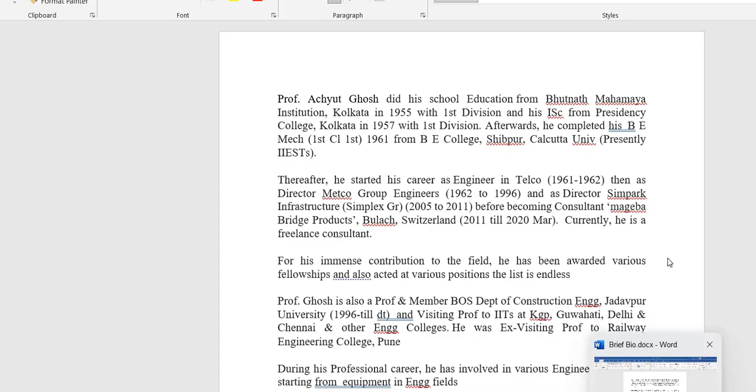I'll try to enter my screen. Enter, this is one, okay. Your entire screen? Yes. Here, which one? No, this one. This one. Mute. No, huh? Cancel. Mute. Sir, may I help you in sharing your screen? Mr. Ghosh, you are muted, please unmute. Mute and share your entire screen. Is that it? Yes, yeah. Yes, and then which one?

I'll click this one, the present now next to the hand symbol. Yeah, you have a top arrow, sir, can you click on that? This one? On the right of the hand symbol. Hand symbol is there, the one next to that, to the right of it. Present now. Huh? Share. Yeah, sir, it's coming up. Wonderful, we can see it now. You can see it now? Yes, okay.

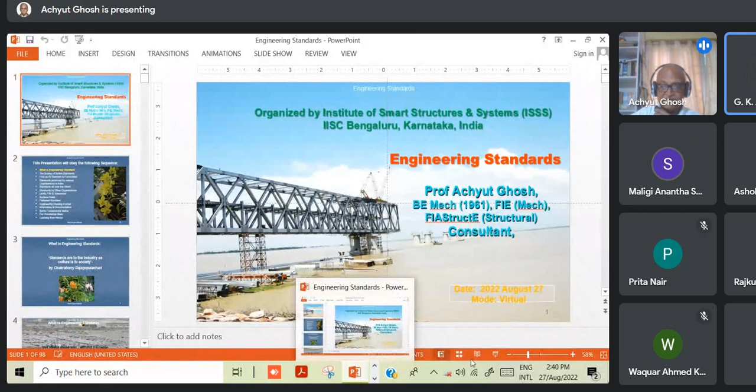So, how do I change the screen? You can click on the PDF file which you have, or the PowerPoint, whichever - this one I have to remove, I have to shift to that. Wherever the PowerPoint is. While it is opening, you can hide that small pop-up thing - yes, sir, the pop-up. Hide. Above - no, don't click that, not that, sir - hide, on the right, hide. There, yes. Okay, wonderful, now you can go to full screen. Full screen, yes. Can you see it now?

Yes, sir, wonderful, it's clear. Can you see me also, or only the screen? Yes, we can see you also. Oh, that's fine, I have done it. Thank you. So I called my granddaughter - I mean, these things are very touchy - so I called my granddaughter and she helped me with this.

Okay, now it is 2:40. I hope you will give me 45 minutes. Yes. So it is 2:40. What I'll do is share my presentation in two parts. One is 30 minutes, which will be on the job itself - engineering standards. And for 15 minutes, there are certain items which I feel an engineer should know, which are not directly connected with engineering standards.

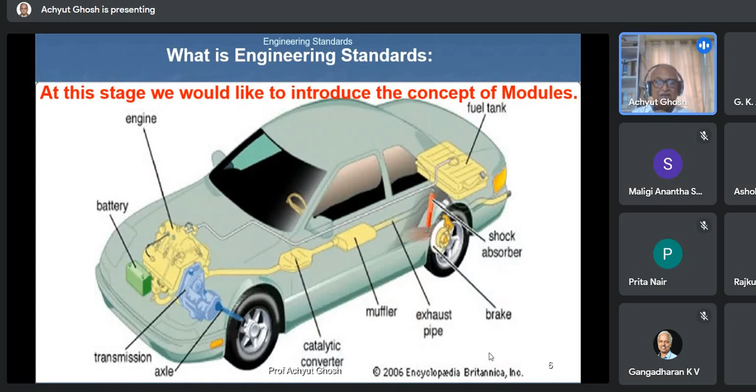This is an engine manufacturer. He knows the engine. To the next man, that is the transmission, you can see the right-hand picture, he knows about the face to which the clutch will mate and the hole on which the clutch transmission assembly will be aligned. So he knows these two things only, and the space given to him by the car manufacturer. Nothing else he knows. He knows maybe the number of gear shifts and all this. So this is how the engineering industry works.

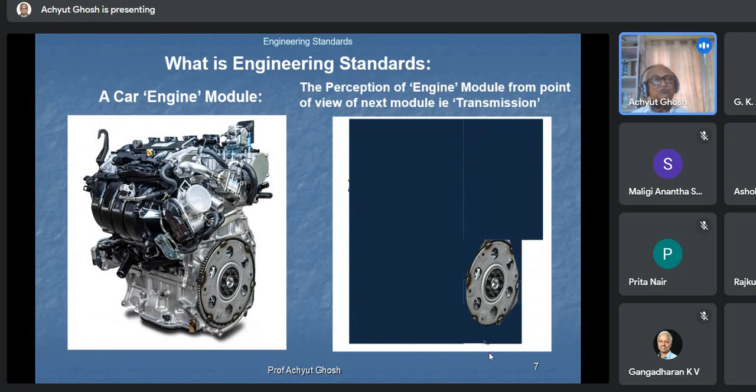Unless there is some standard guiding the people what to expect, nothing will work. You cannot go on giving all manufacturers lots of statements saying this will look like this, this will be like this. That will take 5,000 pages at every stage of transfer. That is not a done thing. What is a done thing is we accept one standard, that is limits, fits, and tolerances,

and the various codes developed by the Indian Standards Institution, that is the Bureau of Indian Standards, and then ISO, International Standards Organization, which we will come to in due course. So there could be standards on anything: on a soap, on a light, on air conditioning, on a bottle, on anything, on threads. But for our discussion, we'll spend a few minutes on limits, fits, and tolerances.

This is how a car part works inside. The piston may be made in Italy, the camshaft may be made in Yugoslavia, the gears may be made in India, like that. But everybody follows a standard and a specification, and the whole assembly works.

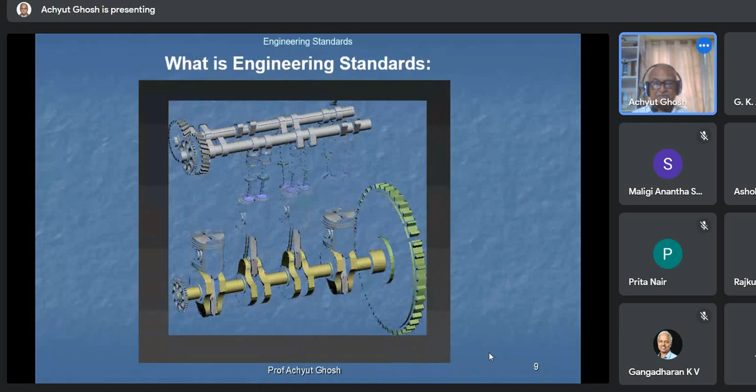So these are various data in '46 the Department of Industry thought about. In January 1947, the Indian Standards Institution was started. Mid-1980, ISI became BIS, but we go on, and only the Bureau of Indian Standards Act in 2016 has been created. Very late, but it doesn't matter. This Bureau of Indian Standards is a purely Government of India organization.

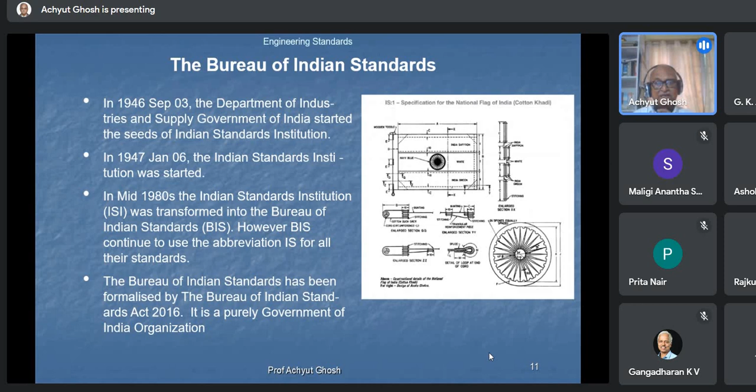How an IS standard is formulated, this will take a few slides.

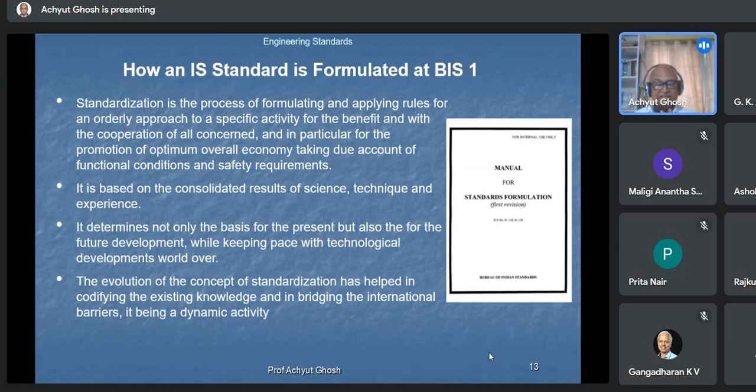There is a manual for standards formulation. These manuals talk about the process of standardization, how it is created. I will not read all this, it will take a lot of time.

There are various groups, SMBC, SMDC, etc. And as on date, there are about 20,000 Indian standards published. As I said, it could be on various things, a light bulb, a pen, like this.

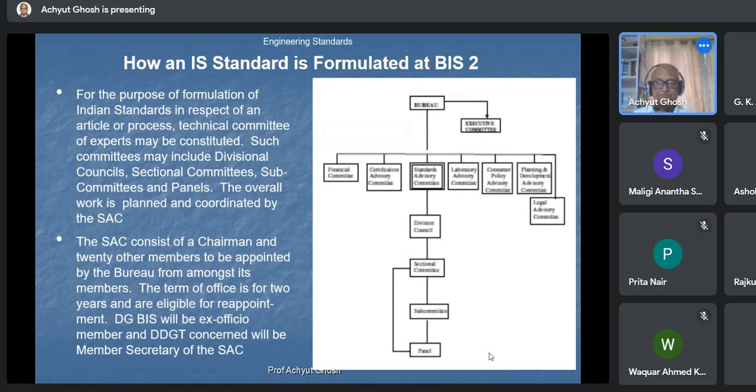Next, we'll show you 3 facsimiles of IS standards. One is 1231. It covers the frame of squirrel cage motor, or let us say electric motor.

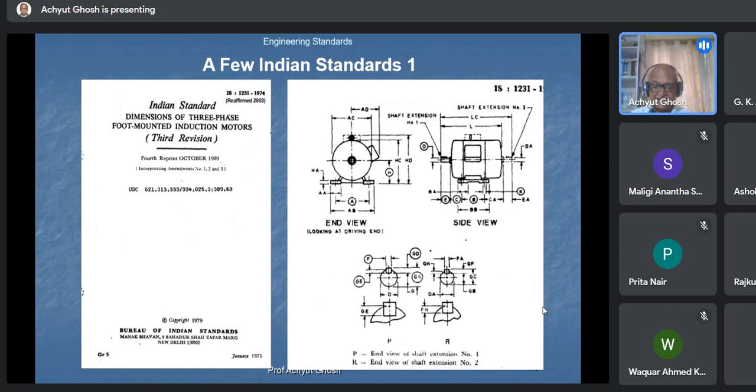It covers the frame, and the basic thing is this height, H, height from the base. So the frame is like this. You can see the frame numbers on the left, 90S, 112S. 112 means the height of the center line from the base is 112 millimeter, but it could be S, M, L, meaning the length could be small, medium, or large.

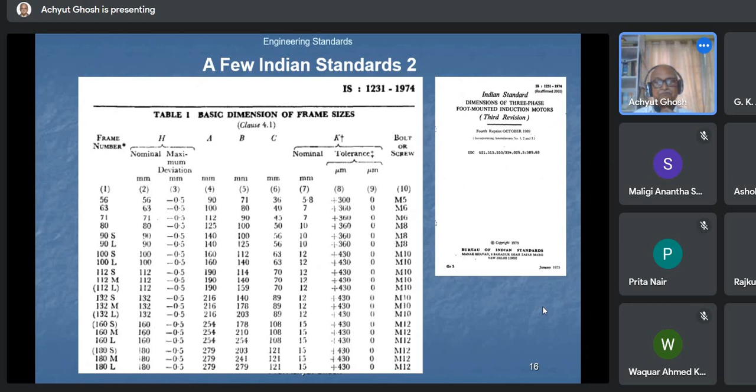Any motor manufacturer can accept any of the frame sizes for output torque, 5 kilowatt, 3.7 kilowatt, 20 kilowatt, but he can use his own cooling system. The most efficient design will provide the highest torque at normal temperature with a minimum frame size, so his cost will be minimum. So this is our IS 1231.

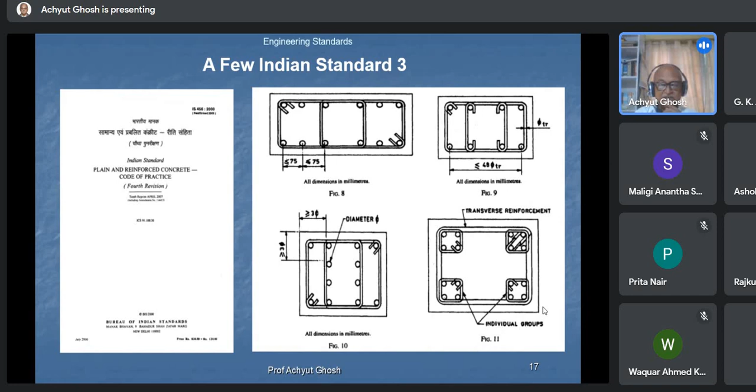Next one, we'll cover one from civil engineering, IS 456. It gives details on the detailing of concrete structures, how the reinforcements are being made, and that kind of thing.

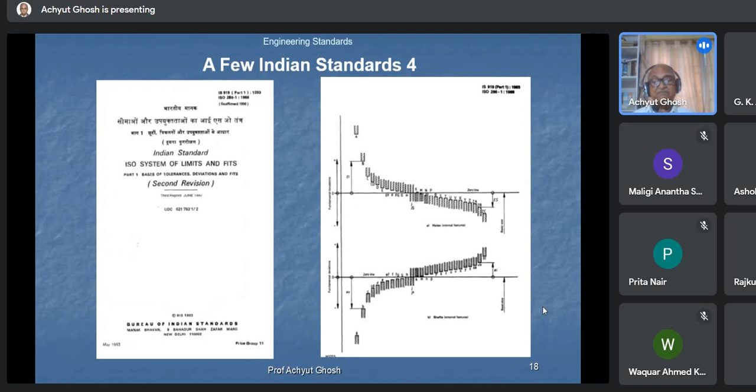And then we have got ISO 919, IS 919, ISO 286. That tells you about the system of limits and fits. It's an ISO system of limits and fits.

There is another side effect to it. This ISO is an International Standards Organization. Any country can join it; there are certain obligations, certain rules. About 166 countries have joined. They are free to accept any of the standards published by ISO, or they can print their own standard on the subject if their country's standard does not match with it. But India is a signatory of ISO systems, so most of the ISO systems are applicable in our country unless specifically negated.

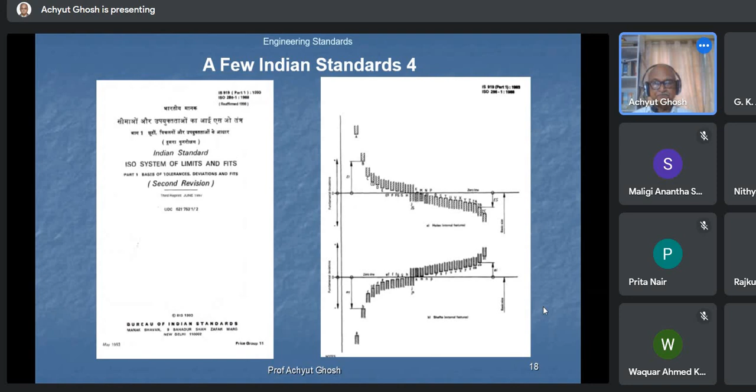So now we'll come to various other organizations producing standards in our country. That is Indian Roads Congress. I must say I am deeply involved in this standardization process, and I am a member of some of the committees, and I work for it.

As of now, we are preparing guidelines for the detailing of structures. About 13 engineers, some of them IIT teachers from Chennai, from Kharagpur and other places, are members of the team, and I happen to be the convener at the moment for this team.

But there are other things, bearings and structures. Then there is Indian Railway Standards. By the way, they subscribe to IS, but there are certain railway functions which are Indian, like the axles, like the bearings, so they prepare the standards and we have to follow. Any supplier of Indian Railways will have to follow this standard.

Then there is Bureau of Indian Standards. Then IPSS, Interplant Steel Standards. What happens is the steel industry has got special demands, like cranes, like hooks for the cranes, like couplings, like some of the transmission gears. So these IPSS may accept the Indian standards, or they prepare their own standard over and above.

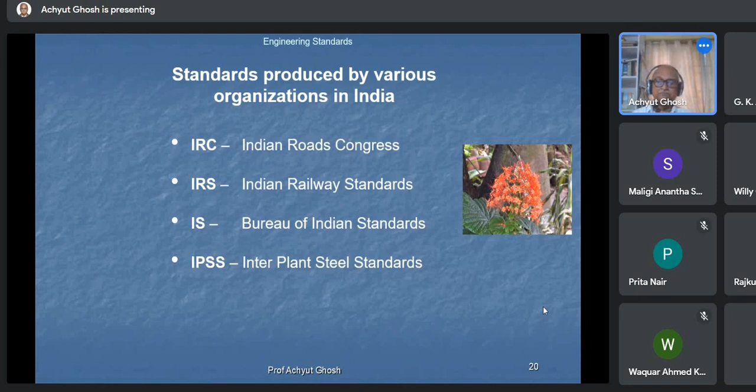And then European norm, European standards in English. They are printed in 5 languages, also known as Euro. Earlier there was BS, British Standards, AFNOR the French, DIN the German, but now all of them have merged in the form of Euro, and mostly whichever country's standard is very good on a subject, Euro accepts it. So sometimes they say BS Euro, sometimes they say DIN Euro, like that.

We have observed in our work that the British standard and DIN standard are mostly selected for our EN, Euro norm. Then in USA, there is ASTM.

AASHTO is there, AISC is there, then ANSI, API, ASM, ASTM, AWS, FEMA. AASHTO is the roads standard. AISC is American Institute of Steel Construction. ANSI is American National Standards Institute. API is Petroleum Institute.

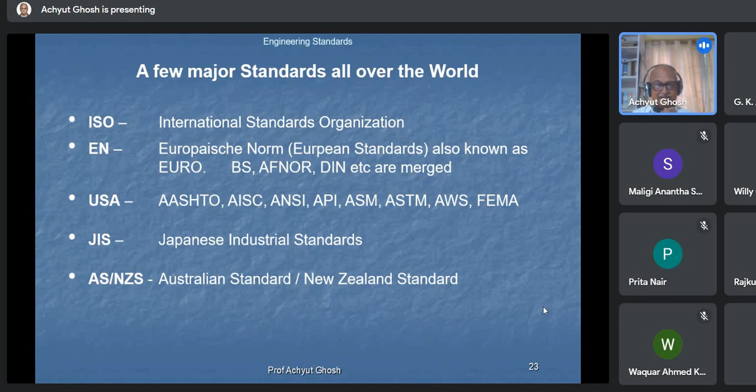One funny thing is in the Middle East, or in US, or in one of the underdeveloped countries, there are consultants from Europe, consultants from USA, consultants from JIS. Unless the country's contract insists on certain standards, the contractor follows their own standard. Then there is Australian standard and New Zealand standard, which is quite limited.

Then there are standards by other organizations, like FM Global. This is a US insurance company. It is so large, it covers factories and storages and other establishments by insurance. Its fund position is enormous, so they have their own private standard.

It's a private standard. Whoever wants to come under the umbrella of the US insurance company FM Global has to follow their standards. It is not contradictory to Euro or ANSI or ISO. It is their own standard, particularly for the insurance purpose.

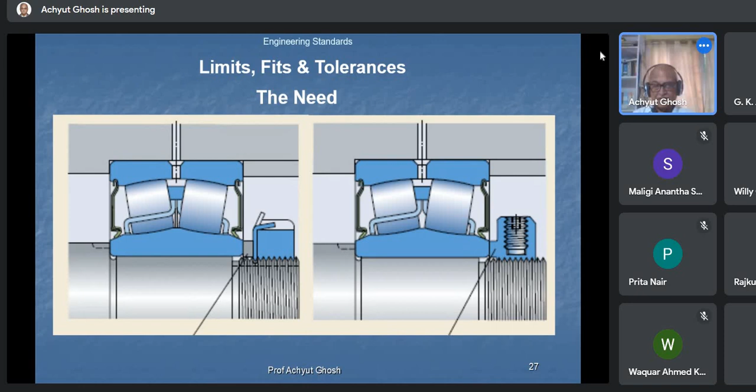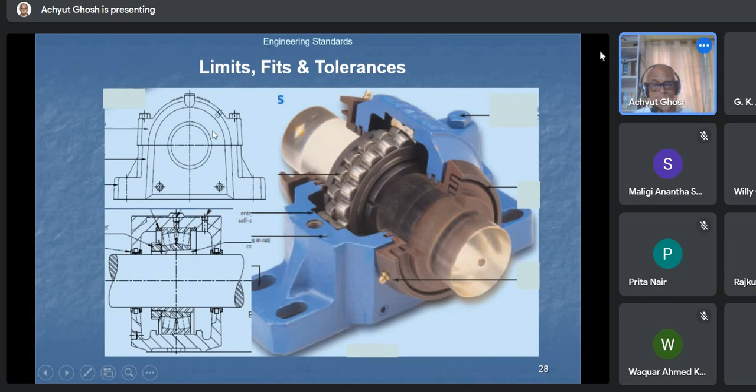This is quite important, I want to read it. The need for limits and fits for machined workpieces was brought about mainly by the inherent inaccuracy of manufacturing. When we manufacture, we can never reach the ideal dimension, never. Coupled with the fact that exactness of size was found to be not necessary also for most workpieces. It is found sufficient to manufacture a given workpiece so that its size lies within two permissible limits.

The Ecart superior, Ecart inferior, the tolerances, this gives the variation in size acceptable in manufacturing. What is the total tolerance? I'll come deeply on this in a few more slides. Similarly, where a specific fit condition is required between mating workpieces, it is necessary to ascribe an allowance, i.e. a deviation, either positive or negative, to the basic size to achieve the required fit, which could be clearance, interference, or transition.

So you see the basic size, say I call it 25 millimeter. The shaft is 25 millimeter. I can never give a shaft, by drawing, by polishing, by whatever, a dimension of exactly 25 millimeter. There will be tolerance on it. And also all through the length of the shaft, maybe the shaft is 50 millimeter long, I cannot maintain the same tolerance. So there are various variations to this.

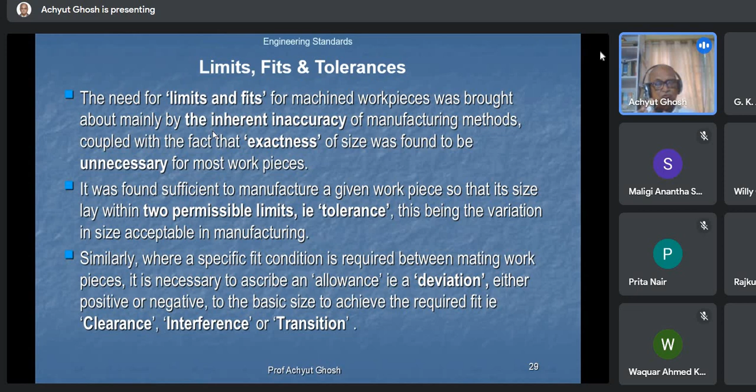We may not go through all this in our lecture today, but I will give you a glimpse of it. Let us see. This is Ecart superior. This is the hole. So what we can achieve is we give a tolerance: this is Ecart superior tolerance, Ecart inferior tolerance.

This is the basic hole. It could be a little bit smaller, it could be a little bit larger. There is a shaft basis system also, same philosophy, but we don't work on shaft basis system in industry. Mostly in Indian industry, a hole basis system is what's used. But when you come to a bearing, it is shaft basis, since the bearing is already manufactured.

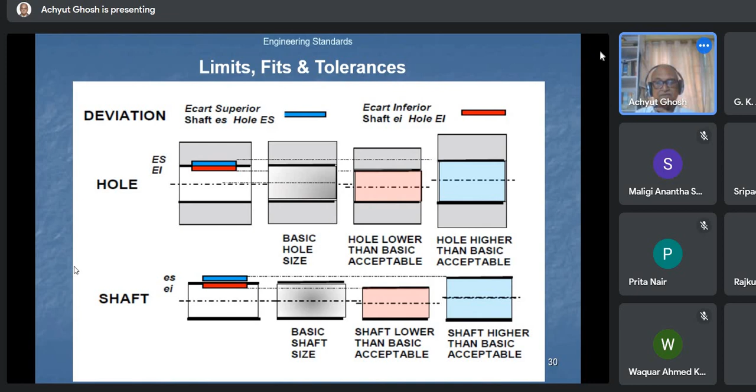So this is the basic size, as you can see, basic size. And the tolerance is always plus, it should be more and still more. So this is my zone of permissible limits. So it says this is the basic size and actual size, etc.

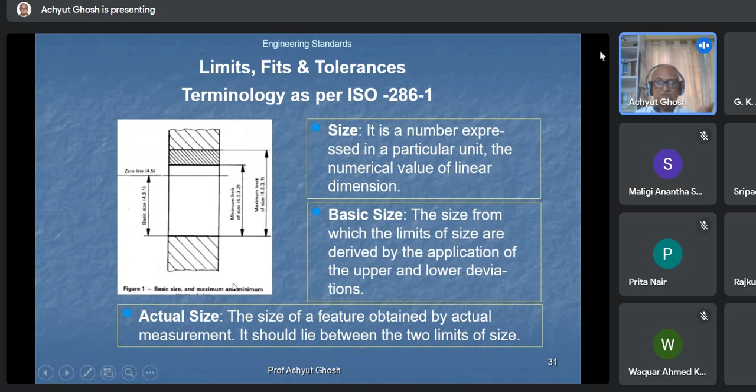So see, if this is the hole it can look like this. It can be here, it can be here, it can be here, anywhere, whatever the designation, I call it H7, H8, F9, whatever. And the shaft can be like this. When the shaft can be like this basic size, it can be less than the basic size, it can be more than the basic size, like this.

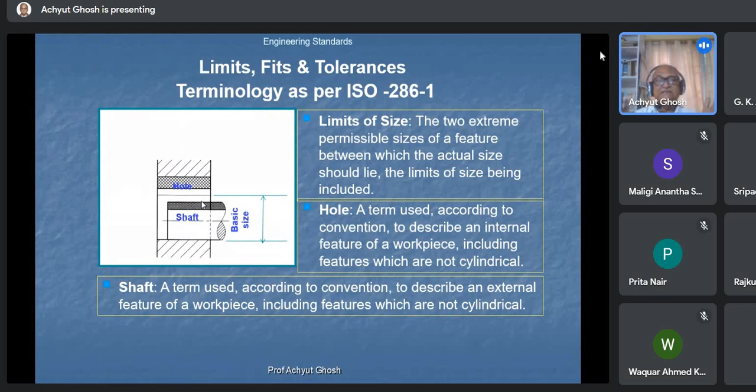There are various grades using capital alphabets for hole and small alphabet for shaft, which gives the designation, and there are 16 grades of tolerance. I'll come to it.

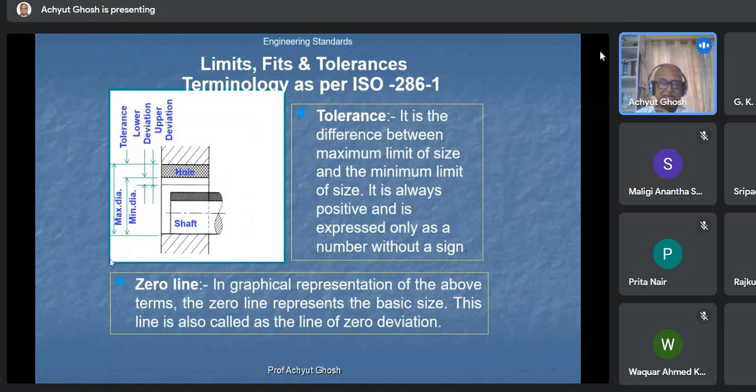So this is the upper deviation, lower deviation, and the zone of tolerance, etc. You can see that this is the baseline. So if my EI is this, it's all minus. ES is this, and this is deviation K. This is A to H. A to H is all minus.

K to ZC is all plus. The zone may be here or here, I'll show it in the later slides. And this is the hole from A to H, it is all plus, and from K to ZC capital, it is all minus.

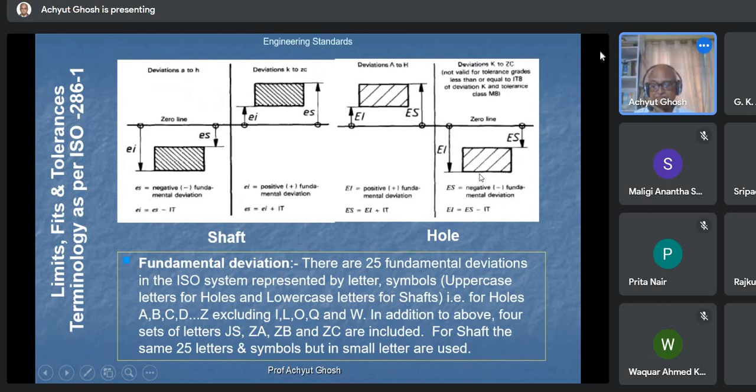This is the tolerance chart. This is the basic size. So this is A, these are holes, A to H, JS is plus minus, and then all this. And then this is for the shaft. This A to H is all minus, JS is plus minus, and this is all plus. Like it shows here, like it shows here, like it shows here.

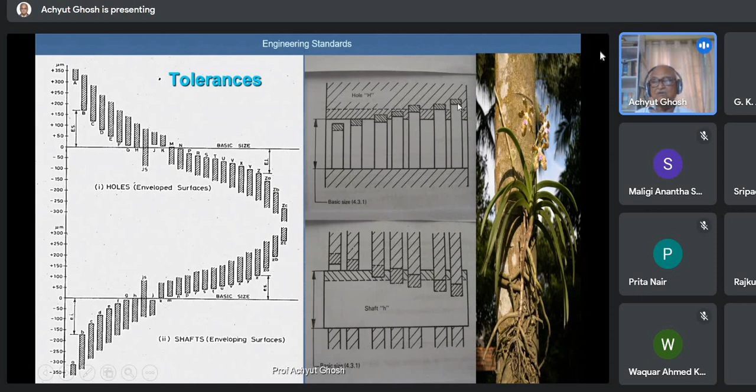Now, what is the tolerance? Let us say we have a hole whose basic dimension is 20.625 millimeter, and then I say plus minus 0.025. That means the shaft is acceptable to me provided its dimension is 20.650 or 20.600 at the lower side. Then it will be acceptable to me. And this is how things are done.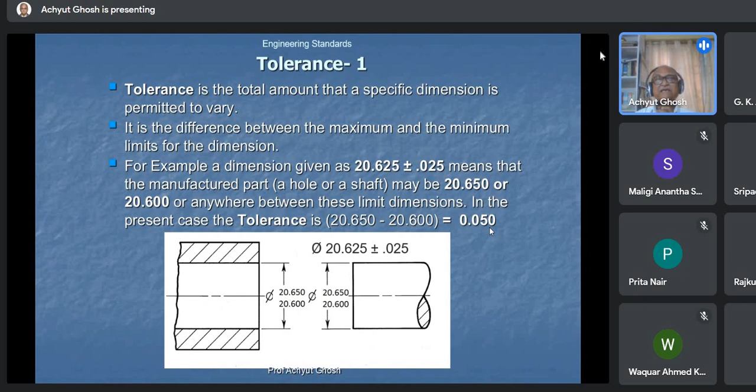Functional requirements of mating parts - what kind of fit? It's a dry fit. It's a bush, I permit the shaft to rotate smoothly with lubrication. The lubrication should not go out. If I make it too tight, the lubrication will go out.

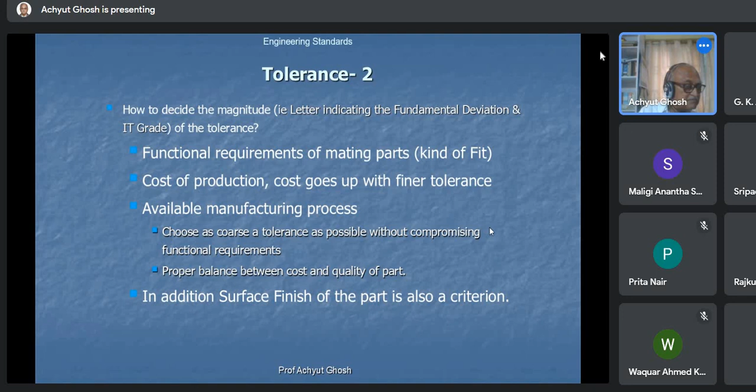I've got a few more minutes.

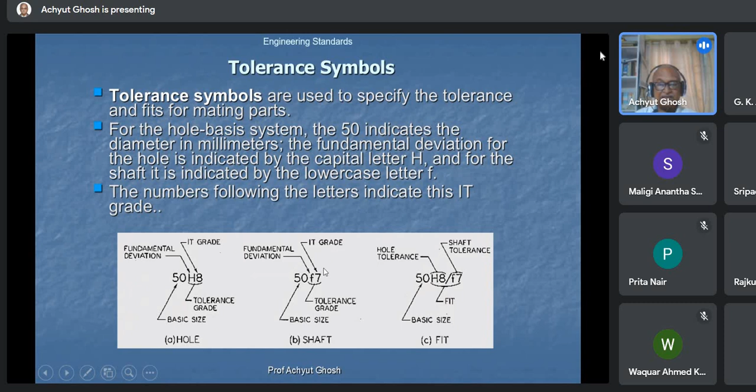So this is how we write in the assembly. 50H8, this is for the hole, 50F7 for the shaft. And the fit is called - if a 50F7 shaft is mating inside a 50H8 hole, we call it 50H8F7. That we note in the assembly, and this in the individual part drawings.

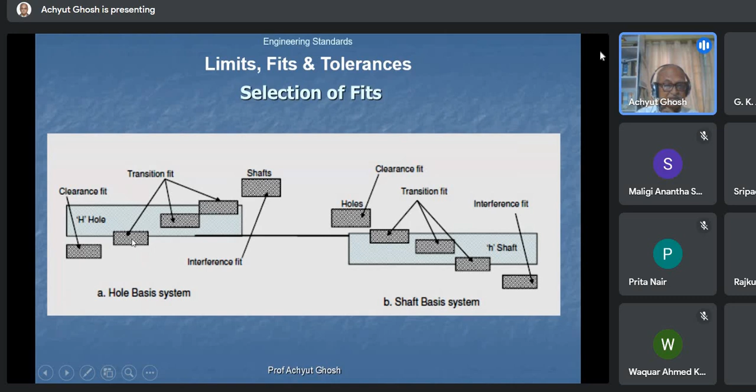Same thing - this is a clearance fit, this is a transition fit, which I can make my transition here. I can make my transition here, I can make my transition here. I can make my interference here. Same thing, very clear I think.

These are a few fits, clearance fits, which are very common in the industry. You see, one never fixes fits with H6, H5 tolerance. We can't do it, we don't have the machine to do it.

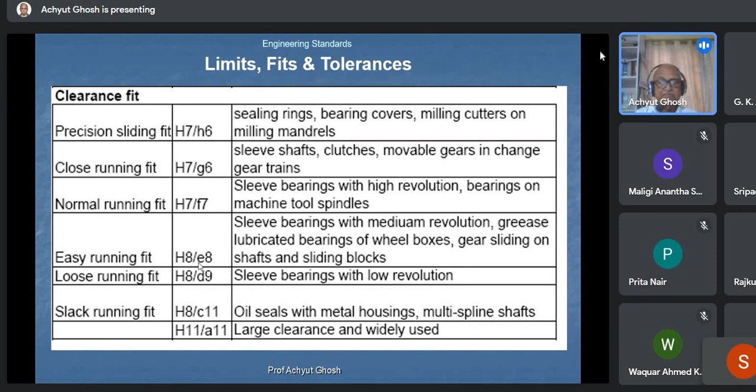You see, H7, H6 will give me a precision fit, but a close running fit is H7, G6. If I don't have machines to do a G6 tolerance, I'll use any other grade, it is possible. If I don't have the machine, I'll use a higher grade to get my fitting. Then there are interference fit and transition fit.

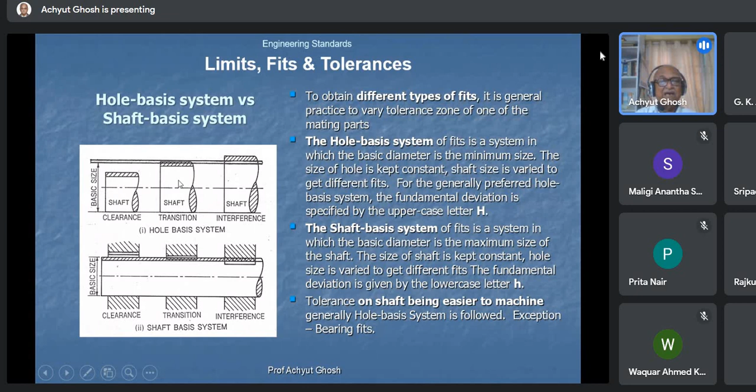This is very clear - hole basis system, very clear. And this is a shaft basis system. Hole we give a basic size, and then we play on the shaft dimensions. Limits, fits and tolerances, various grades.

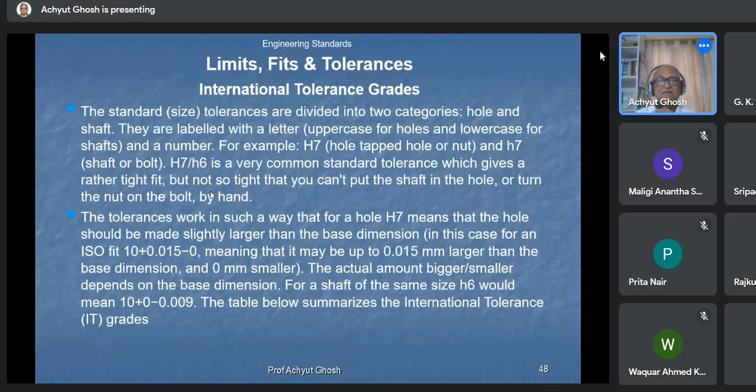Interference fit, we have to go very fast. Now, IT, international tolerance, there are 18 grades, from IT1 to IT18, there are 18 grades of basic sizes, which we don't play in this area. This needs grinding.

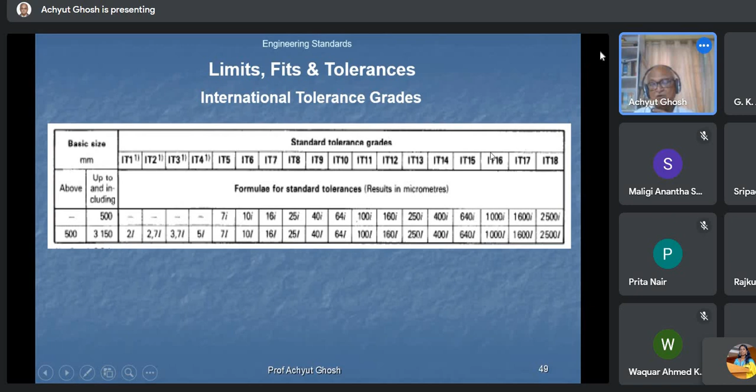This needs special polishing. It is almost, our slip gauges are of this grade. But in normal manufacturing field, we use these grades. But when you go to flame cutting, a hole with flame cut, we come in this range. So these are various international IT grades, and basic size, what is the magnitude of the IT grade at the basic size?

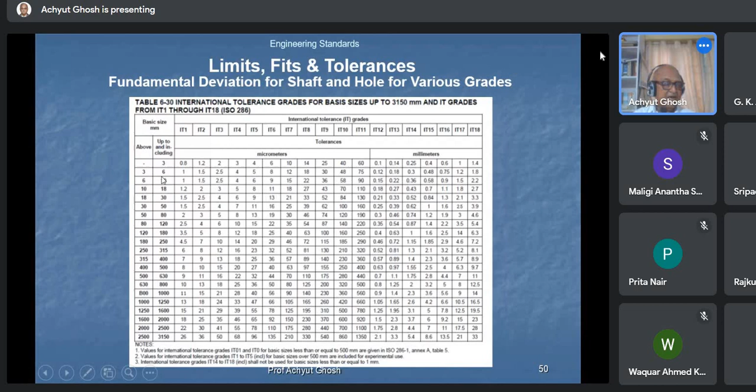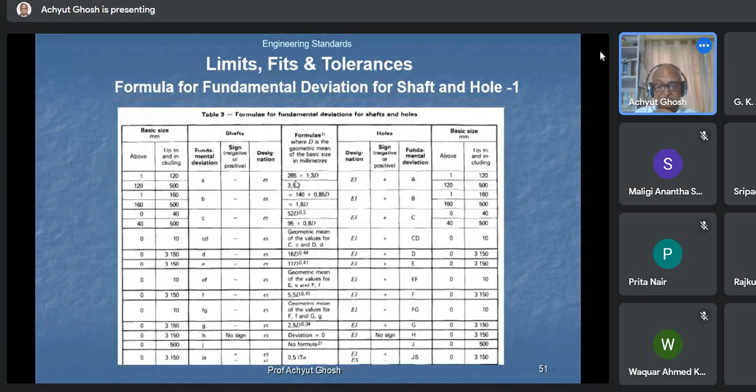I have to go faster. These are various formulas, how the code develops the fit sizes.

Now, one more item in 1 or 2 minutes, surface finish. We need, other than the tolerance of dimension, we need the quality of the surface also. So there is a CLA value and envelope method.

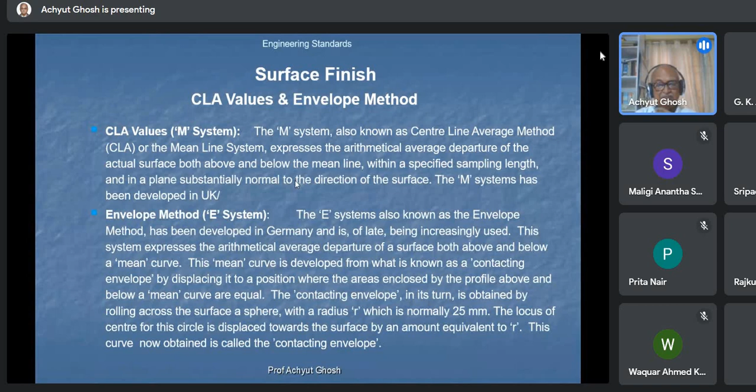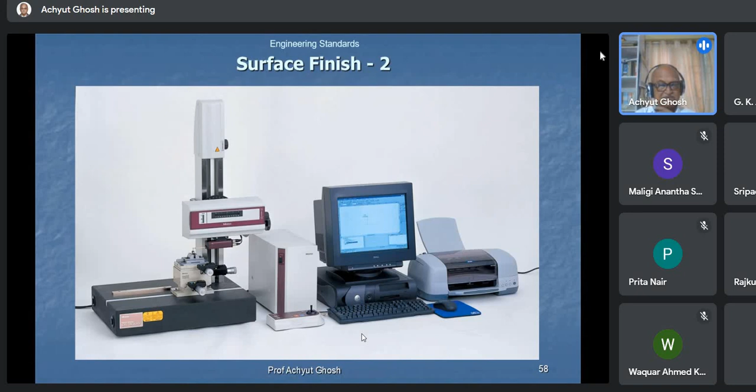We follow the envelope method, the German system. This is the gauge, this is the pointer which we slide. But there are machines to do checking on the surface finish and what kind of tolerances, surface finish grades we can achieve in various kinds of machines. Only with lapping we can arrive at a tolerance grade of 3 microns, etc.

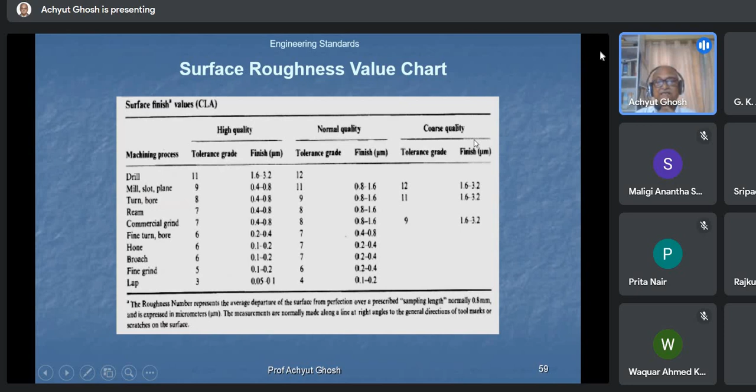Surface finish chart. I have to go through the meaning of the symbols, the meaning of the symbols, surface texture.

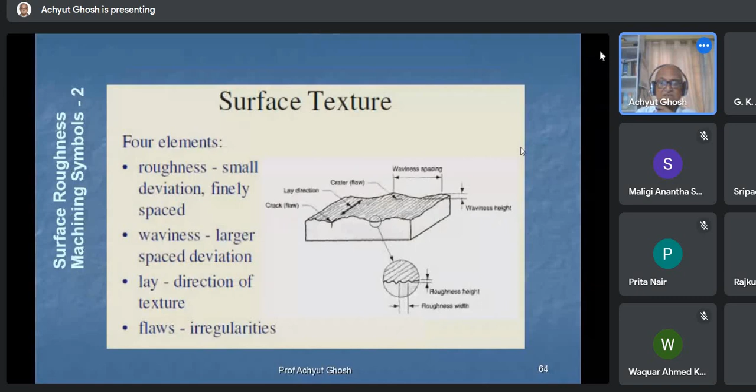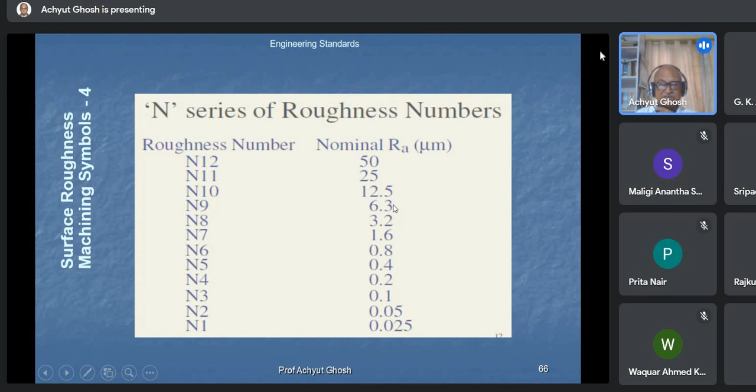Oh, this is very important. Roughness number. We say the roughness number is 6.3 or 3.2, which comes to preferred number. I'll come later, but we don't say 5.1. That is not accepted.

So I have consumed about 42 minutes. I believe 32 minutes, and I have finished the subject. You can later on ask me any question, sir. Any question, without question a presenter feels cheated. Any question is a good question. Nothing, if I have been able to convey my wishes, my presentation to you, that is fine. Then if I cannot convey, that is my failure.

So we come to certain items, these items, which are very near to my heart and which I feel one has to use as an engineer.

Preferred numbers. You see, you get 10th root of 1 to 10, 20th root of 10. So, and then we get, I have to take 1 hour to lecture on this subject, so I don't have that time.

So I'll just say, we go by this choice mostly. If you have to say you are making a shed for a factory, what should be the dimension of column to column? You can say 4 meter, you can say 5 meter, you can say 6.3 meter, you can say 8 meter. What is the beauty of it?

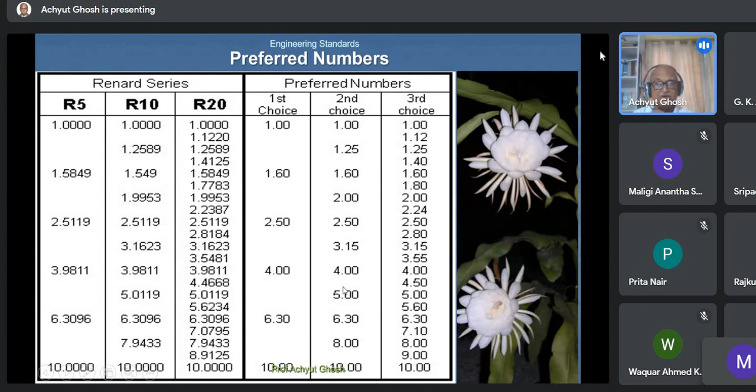But you find he will serve the best amount of customers if he makes 100 motors of 1 kilowatt each, instead of if he reduces inventory to 11 numbers only. So this will be his choice, the second choice will be his choice. 11 numbers only for his motor, 1 to 10 kilowatt, or 11 numbers only 1 to 100 kilowatt for his motor. He will serve anybody within 6.25% of his needs at this level, and here within 12.5% of his needs.

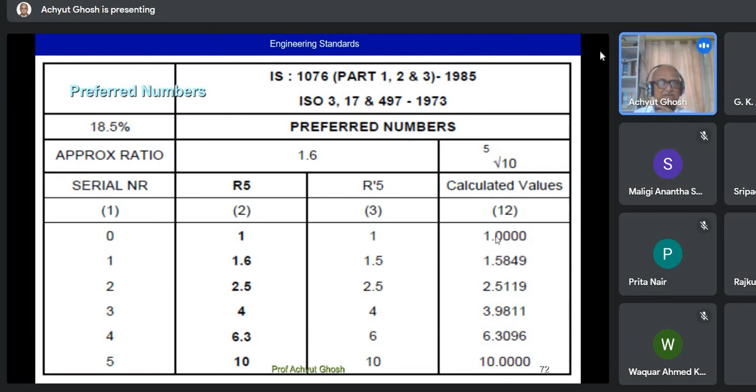There is the IS on it, IS 1076, part 1, 2, and 3, giving the preferred numbers. I use it very often in all my work, in all my design works and everywhere. Why do I start? I start with any of the preferred numbers.

So next is the engineering drawing format. We have got, you all be knowing A0, A1, A2, A3, A4. Our books are all A4, some of them are A4, A5. But then what is A0? A0 is 1 meter square, the area of the drawing is 1 meter square.

Now, if this side is this side by root over 2, then if you fold it, you always get the same ratio. So that way we have come with the equation that 841 by 1189 gives 1 meter square area, and this is A0. You halve it, then that 1189 halved becomes 594, and the other side remains 841. You halve it again, 841 becomes 420, and then like this.

This is covered in IS SP26, engineering drawings. There are a few more ISS on engineering drawings, but this is the basic thing we must follow in all our documentation. It has to be either A4, A5, A3, or A2. Otherwise, you cannot fold it.

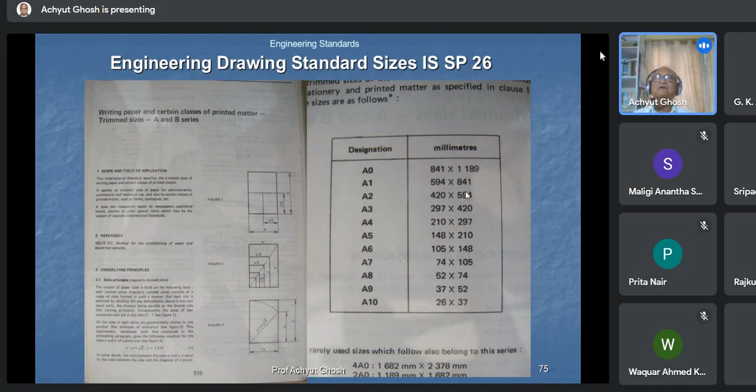There are standards for folding, standards for everything, after all, racks are made. If you make a rack for a 12-inch or 300 millimeter book, and you go on filling it up with only 200 high books, then it's a loss for the library.

Now we'll come to information and documentation. There is a book, UDC, Universal Decimal Classification. Any subject under the sun can be given a number. 621 is mechanical engineering, 624 is civil engineering.

So this BS 1000 is a very abridged version of UDC covering all branches. Basic sciences are 5, it starts with 5, not 6. Applied sciences starts with 6. Philosophies start with 1. So I may be wrong in my statement, but 5 and 6 I know — 5 is basic sciences and 6 is engineering sciences. And then you can go on increasing the number.

I'm sorry, this is again a half an hour lecture, I cannot do it now, but you have to be happy with it. Whoever is interested may look into it. I follow this in all libraries — they follow some Dewey Decimal form or UDC form or some other form. In ISS, you will find the UDC number already printed.

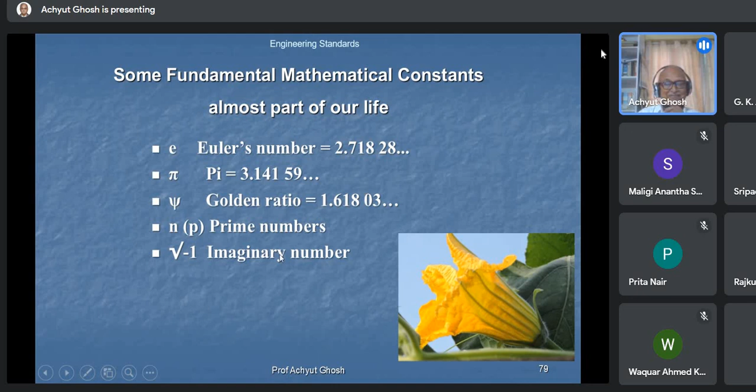Now we come to a few more interesting subjects. That is our knowledge base.

Somebody asked Professor Albert Einstein what his laboratory was. He showed his head. And there is a passion — so we have to develop the passion. We must enjoy what we are doing. We must enjoy.

Please read. Gradually, with the advent of this terrible media, we have got no time to read, only to learn. People can say they commit mistakes in presentation, but when I write something and publish a book, that will be for eternity. So I have to be very careful what I am saying, and I check and recheck before I commit to printing.

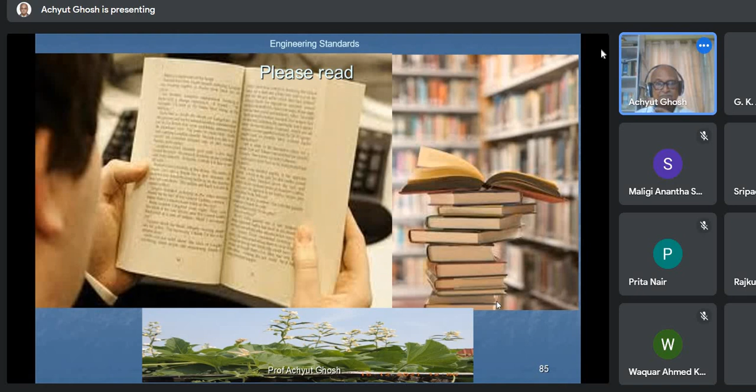And there are lectures, the 8.01 series — MIT has given all lectures on the internet. Professor Walter Lewin's lectures in 8.01 and 8.02 physics are marvelous. I like them.

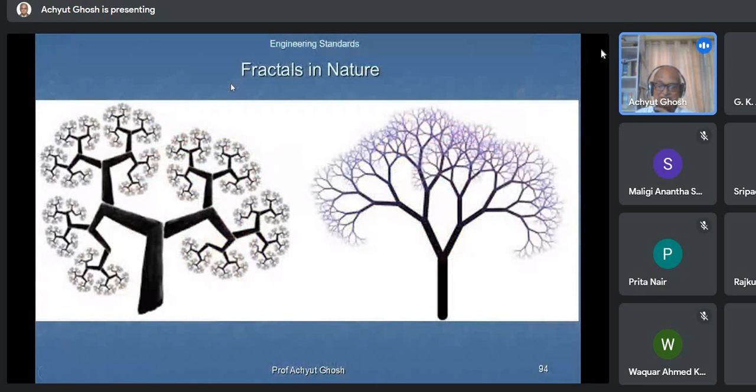In Geneva, in the United Nations office, there is a garden, about a 30-acre garden. They have got Europe, America, like that, various areas, where they have put plants from those regions. And there is a garden, Jardin garden, for mathematics as well.

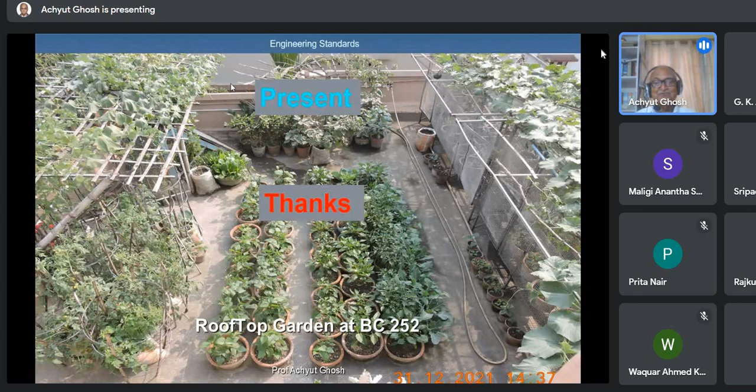So I had a garden like this in North 24 Parganas. But it has been taken away from my hand. That's another story, that's our West Bengal. Now, anyway, at least I am doing a garden on my roof, and it is giving me plenty of fruits and vegetables, and I can distribute.